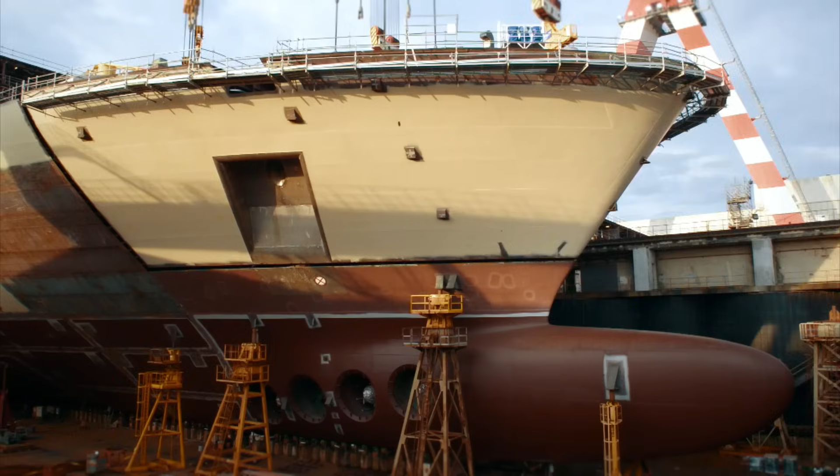Today, this team of elite engineers is embarking on an epic endeavor. It's very, very big. They are attempting to build an extraordinary vessel, one of the biggest and most advanced cruise ships in the world. It's like a puzzle, a bigger puzzle. You cannot make a mistake.

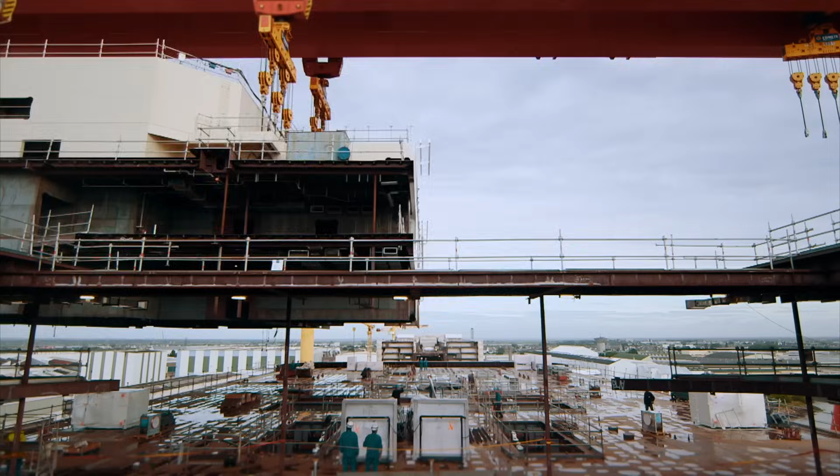This is a ship of giant proportions, constructed from 35,000 tons of steel. It will carry more than 5,700 passengers and have a massive central promenade.

Now the pressure is very high. To build this leviathan, the team must battle mountains of metal. We have to solve problem after problem, and punishing deadlines. We cannot have delay. It's time now that the ship works, and works well.

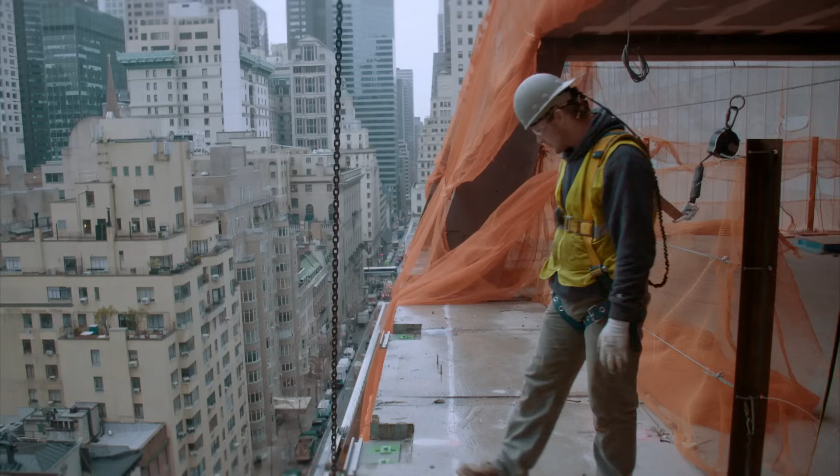This colossal cruise liner ranks in a league of ambitious new engineering wonders that are bigger, faster, taller, and more advanced than anything ever constructed before. This series charts the inside story of the extraordinary challenge of building these giants.

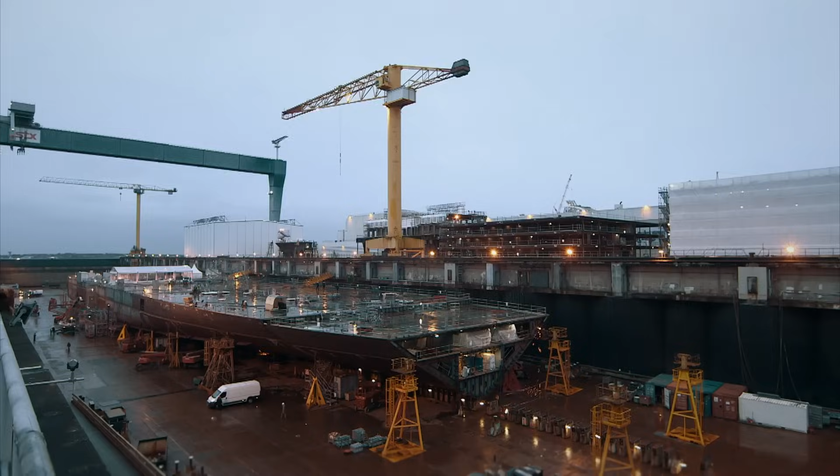In Saint-Nazaire, France, this team of shipbuilders is starting work constructing the prototype of a new class of giant cruise ship. This ship will be impressively huge. The last 15 years, ships have grown tremendously, so yes, it will be big. With its ambitious size and scale, this new prototype will push the boundaries of cruise ship design and engineering.

She is called Meraviglia and is the vision of Pier Francesco Vago. Meraviglia, I think, will really turn heads. We want to make a statement. She's going to be a big ship, and we want to make her fun. We want to have a lot of innovation.

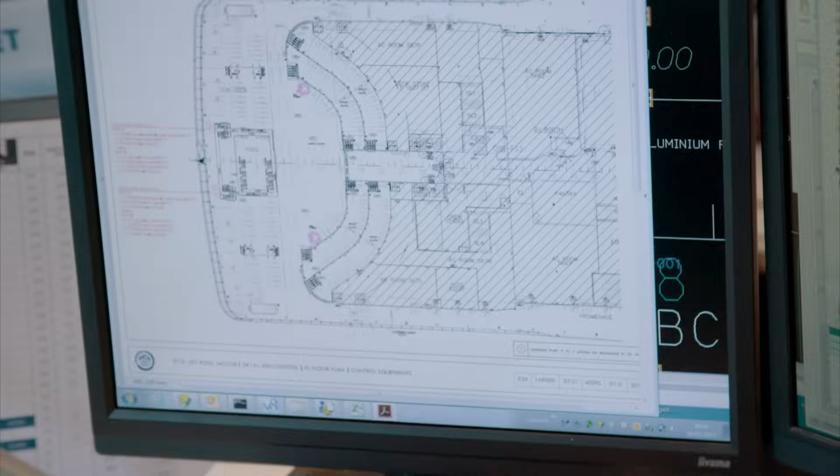Pier Francesco is investing over £725 million in this ocean liner. We're talking about a lot of money, so I'm certainly not going to save on innovation, and I want the latest.

It rests on the shoulders of site manager Gaetano Rolando to make sure that Meraviglia is built to set sail on time. This is a very exciting challenge for me and for all our team, because every day is different, every day is something new.

Gaetano has constructed 6 vessels over the past 15 years, but nothing as ambitious as this one. This is the biggest ship I have built. I'm very excited for this big challenge.

This is the giant Gaetano and a team of 3,000 shipyard workers must build. Measuring 1,036 feet long and 214 feet tall, this ship will weigh more than 3 times as much as the Titanic.

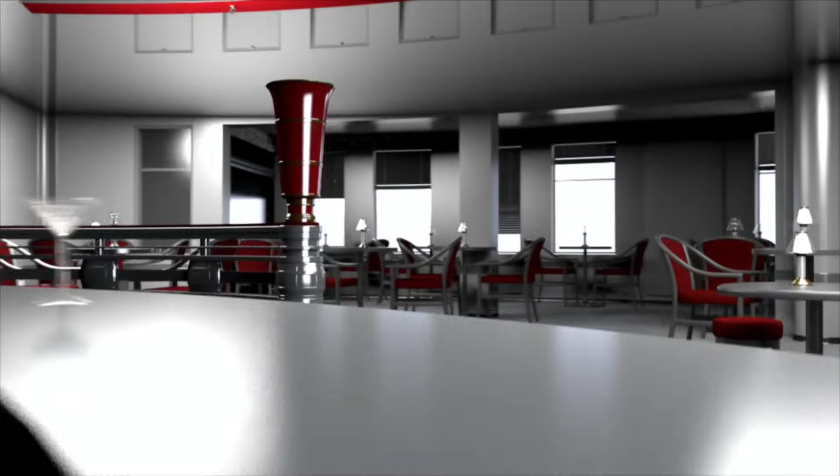On board, they plan to build 20 bars and restaurants, 2 theatres, and 4 swimming pools, to cater for the 5,700 passengers staying in 2,244 cabins.

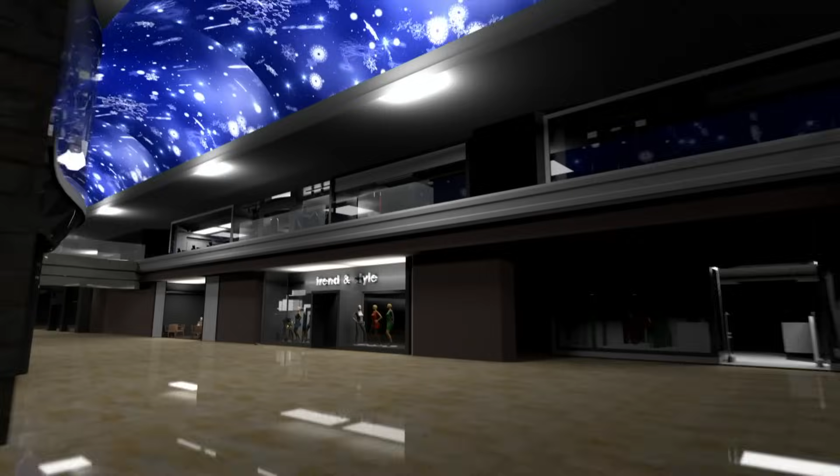4 giant engines will power the ship, propelling 2 rotating 170-ton thrusters. At the heart of the vessel will be a Mediterranean-style shopping promenade, topped with a 262-foot-long LED screen ceiling, the longest screen ever built on a ship.

The company has built 12 cruise ships over the last 29 years, but this will be the largest and most advanced liner they have ever attempted. The pressure is huge, the risk is huge. You keep a ship for 30, 50 years, you can't make a mistake.

To fill the ship with passengers, tickets for the maiden voyage have gone on sale before the vessel is complete, and it's already sold out. Cancelling this high-profile journey would be a disaster, costing the company hundreds of thousands of pounds. So there's no room for delays.

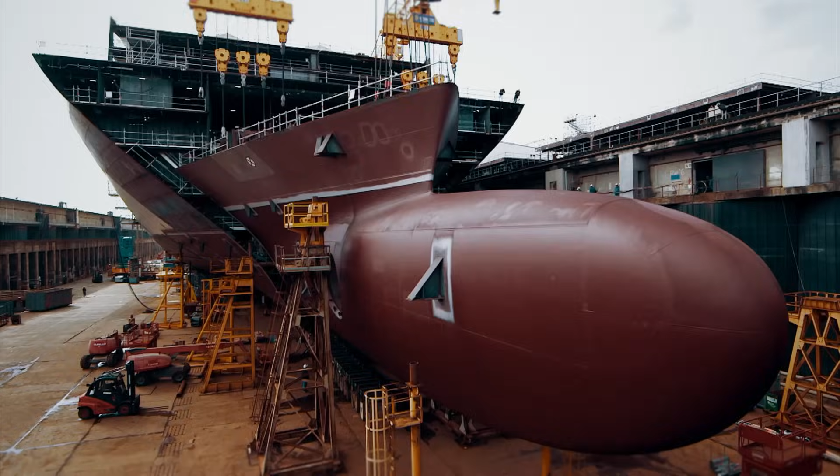The toughest part of my job is to deliver the vessel on time. With the clock ticking, Gaetano and the shipyard have just 26 months to build, test, and deliver the massive ship. Every day, day by day, the pressure on our shoulders is coming.

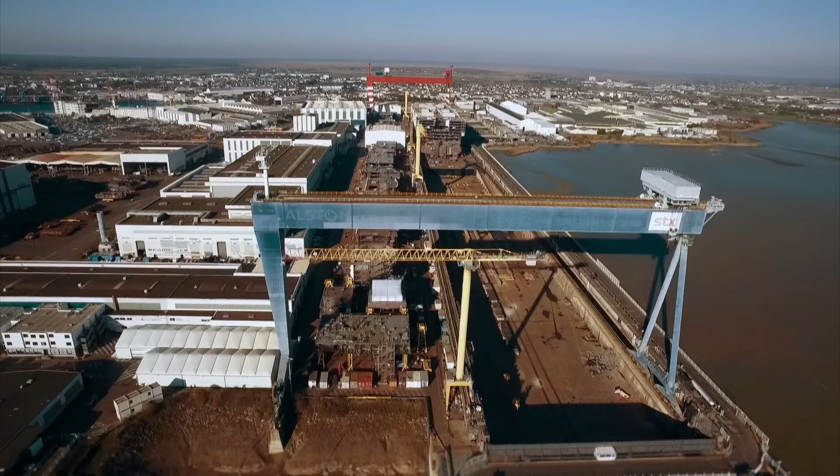Building such a huge new class of vessel requires a huge shipyard. The STX yard in Saint-Nazaire, located near the deep waters of the Atlantic, makes it the ideal place to build this giant.

Marine engineers here have a rich shipbuilding heritage. The prestigious SS Normandie and the Queen Mary II, both the biggest cruise ships of their eras, are just some of the grand historic liners built here. Only a few shipyards in the world can build a ship so big like Meraviglia.

Constructing this prototype vessel involves a series of key challenges. This is the plan. First task: transform 35,000 tons of steel into 50 huge sections, called mega blocks. These blocks will join together to form the ship's hull.

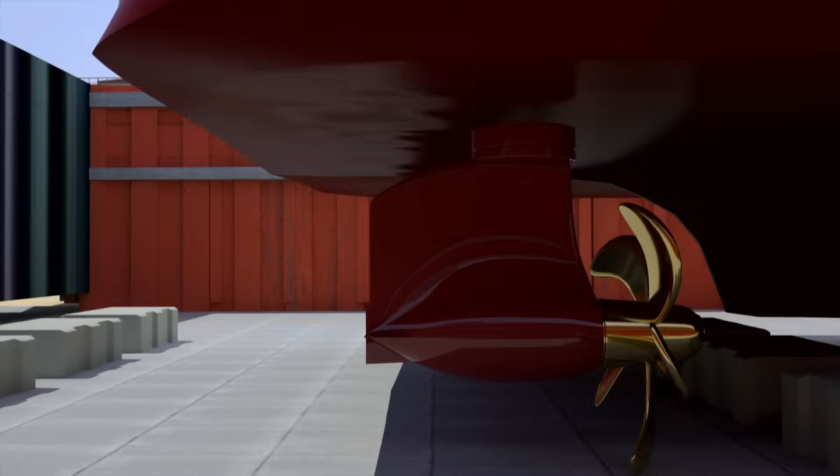Next, workers must build and attach two special thrusters, called azipods. These carry the vessel's 25-ton propellers that will push it through the water.

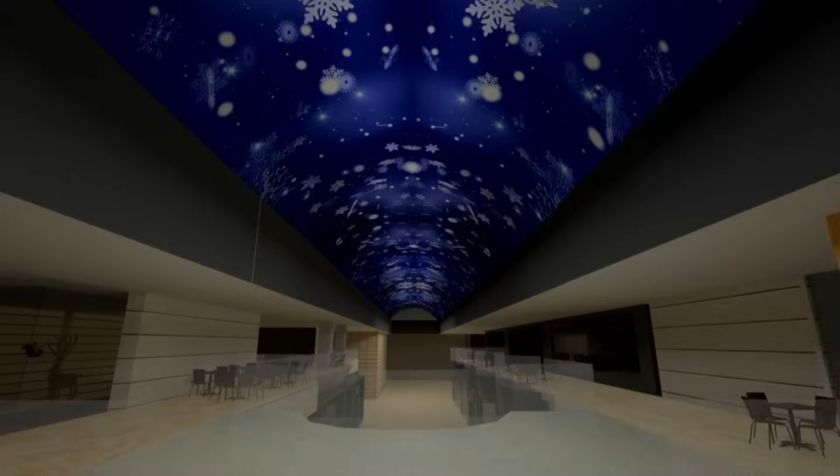Once afloat, the team need to construct and furnish the 2,244 cabins, fit out the decks, and install the 1,450 panels to create the promenade's LED ceiling. Once complete, engineers will need to test every aspect of the ship, putting her through her paces in a series of grueling sea trials.

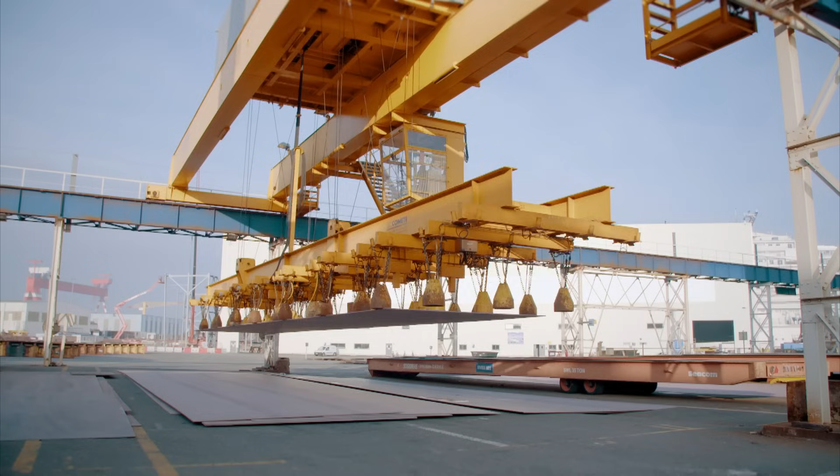Gaetano and the shipyard start with 35,000 tons of bare steel. They must somehow transform it into the 50 giant mega blocks that form the ship's hull. All the steel plates arrive in this position, and then by the crane will be fitted inside the workshop as they need. It's a very heavy and massive challenge for all of our team.

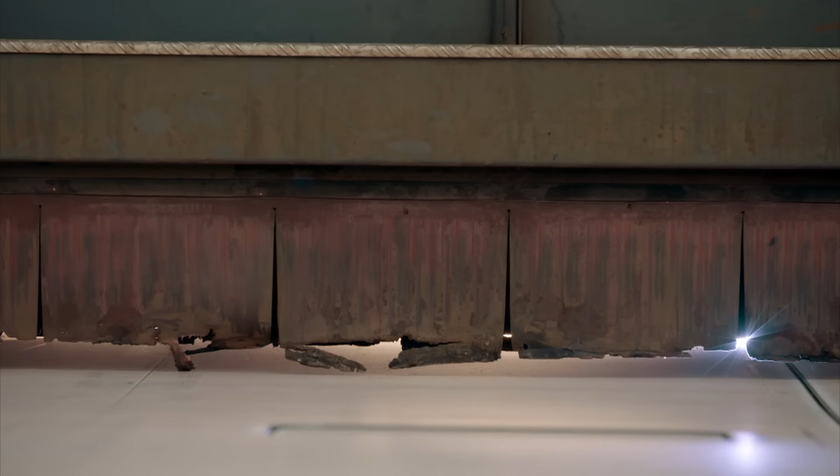Workers feed each sheet of steel into these giant machines. They fire an 18,000 degree Celsius jet of superheated gas called plasma through the steel. This cuts the individual pieces of ship to size with absolute precision. Cutting all these pieces by hand would take years, so they use plasma cutting to be faster.

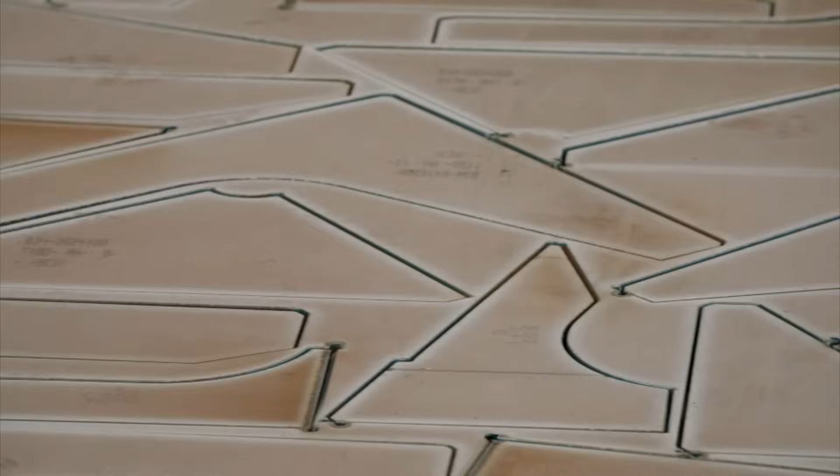They build the blocks from around 300,000 individual steel pieces. It's a giant jigsaw. Workers must sort and deliver each piece to the right workstation so it ends up in the correct place. Any mix-ups could delay work on the whole project. This machine is very accurate and can identify each piece.

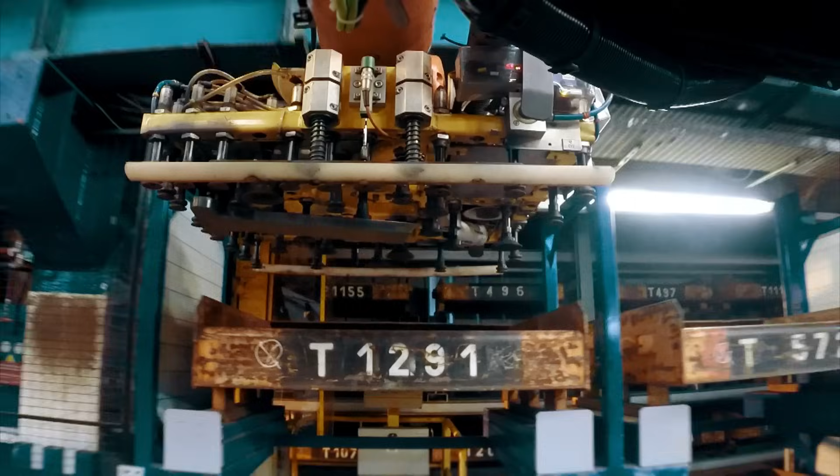Engineers assemble sections of the ship in these workshops. They piece together giant panels that form each megablock upside down. This makes it easier to install the ship's crucial services into the ceiling: the 932 miles of electrical cable, 124 miles of ventilation ducts, and 158 miles of pipework.

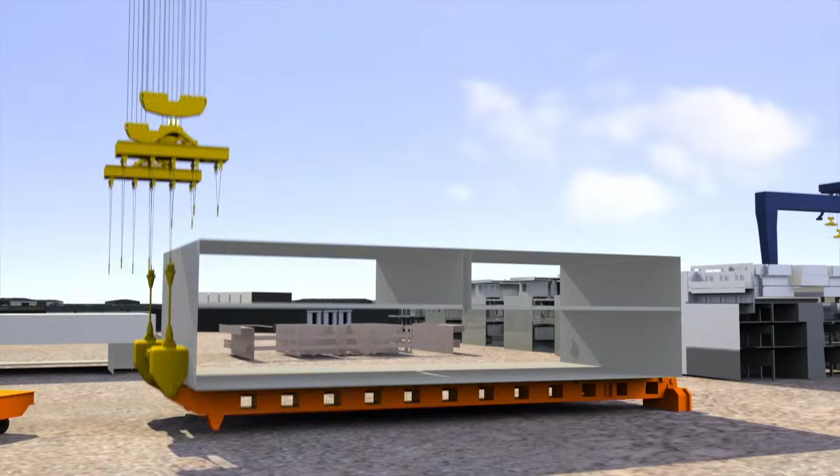Each completed panel measures one deck high. Once fitted out, workers must place it into a special frame to allow the yard's giant crane to lift and flip the panel over, turning it the right way up. Around 20 panels make up each mega block.

The crane lowers each completed block into the dry dock, where workers weld them together. It takes nearly 11 weeks to construct the blocks, but with multiple crews building more than one at a time, this method speeds up the time it takes to build the vessel.

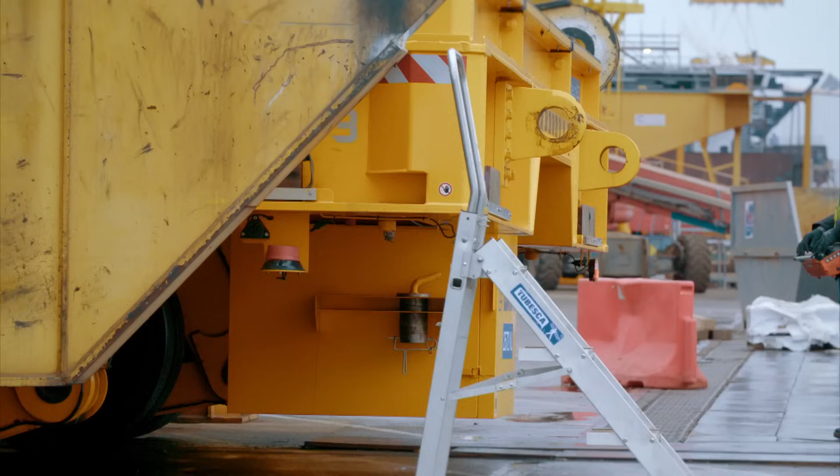This technique is so successful that workers use it to build almost every ship at the yard. For this panel, almost 100 tons is the weight.

They call in this giant gantry crane to turn each massive panel over and assemble the megablocks. Soaring 213 feet tall and with a lifting capacity of 1,400 tons, this is one of the biggest cranes in Europe.

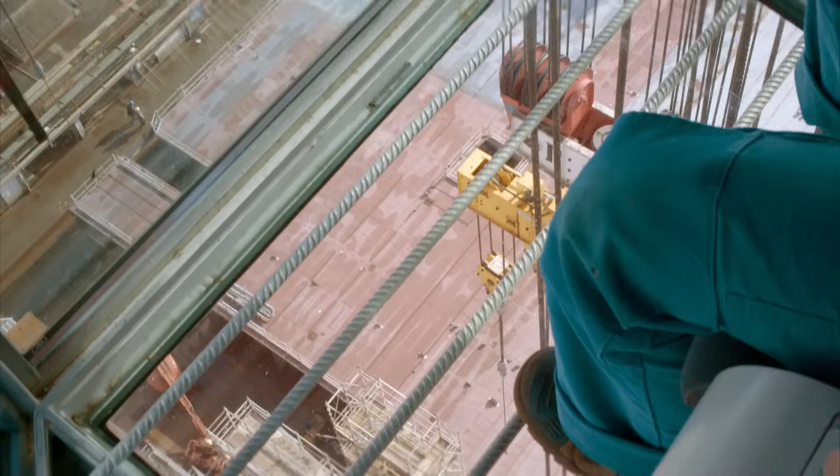In charge of this aerial ballet is crane operator Loïc Gouan.

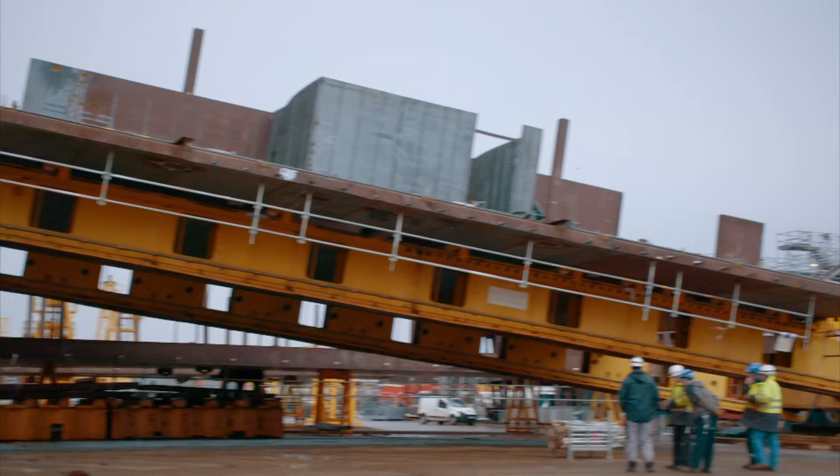The wind is also an important factor of this operation. If the wind is much more, they have to stop the operation. Now is most critical because we'll come out of the hinge.

The panel hangs like a huge airborne sail. A sudden gust now could prove disastrous. It can make a damage to the crane, to other panels, to the people. Up to now, everything is going well.

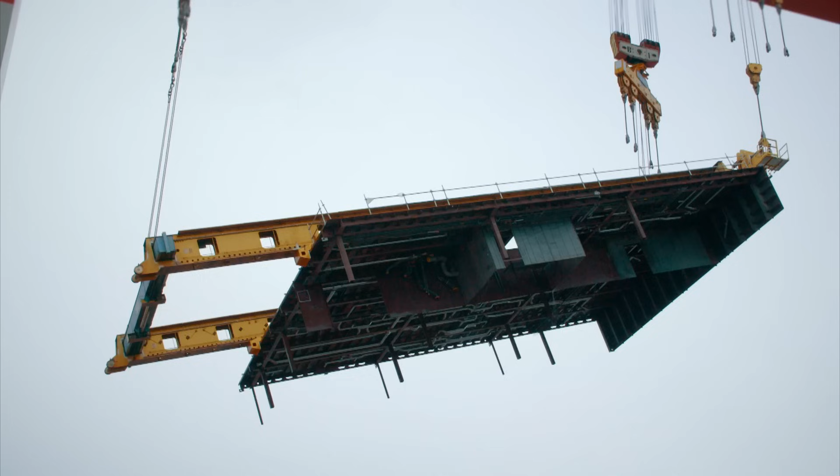They lower this panel down to form the base of a new mega block.

Now is time for lunch. Most important part of the day.

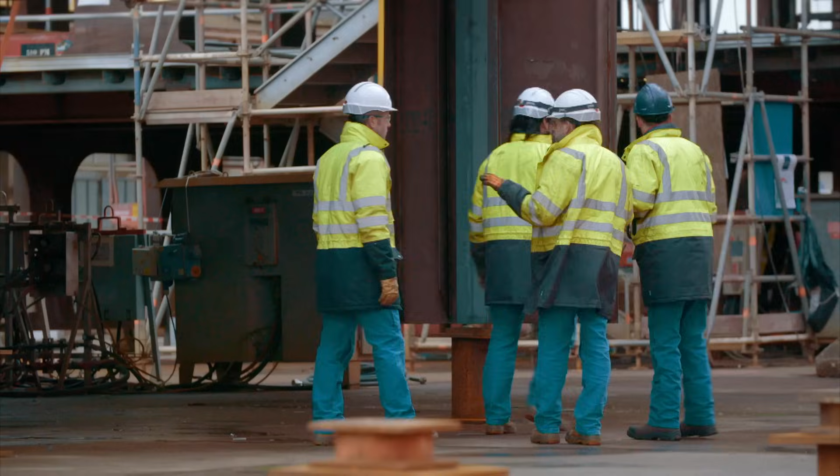Each mega block takes 11 weeks to build. The blocks fit together to form the ship's bow, central hull, stern, and the captain's bridge. It takes around 11 months for the shipyard to fit all 50 giant mega blocks together to form the vessel's skeleton.

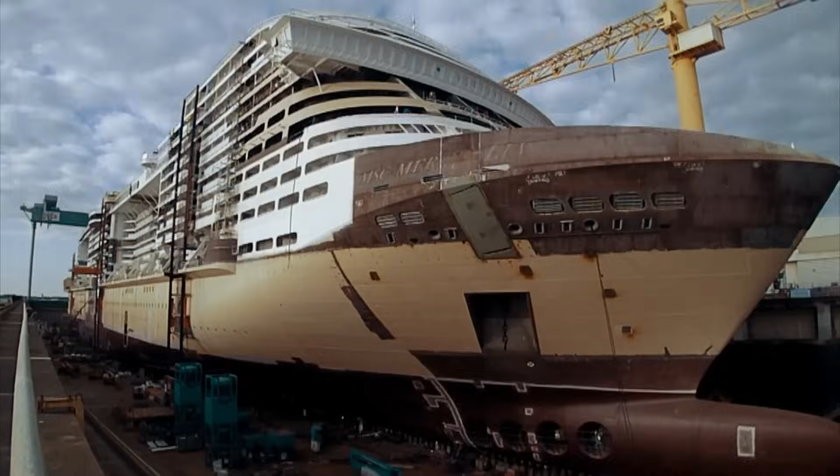With more than 8 miles of joins to weld and 10 football pitches of bare metal to paint, the dock team has their work cut out.

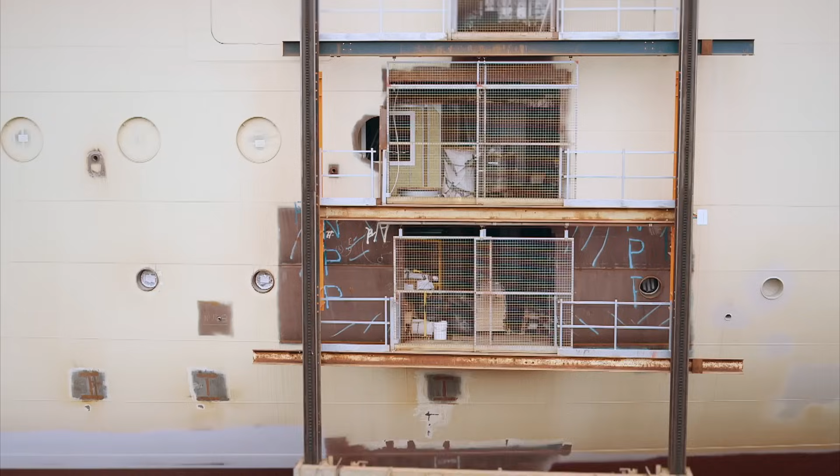As the bare skeleton of the vessel begins to take shape, another team is gearing up to start the monumental task of fitting out the inside of the ship.

Giuseppe Maresca is in charge of overseeing the installation of a staggering 2,244 cabins. It's very important for us to have all the cabins on board in the right time and before the delivery date. Otherwise we will have unhappy guests and unhappy bosses.

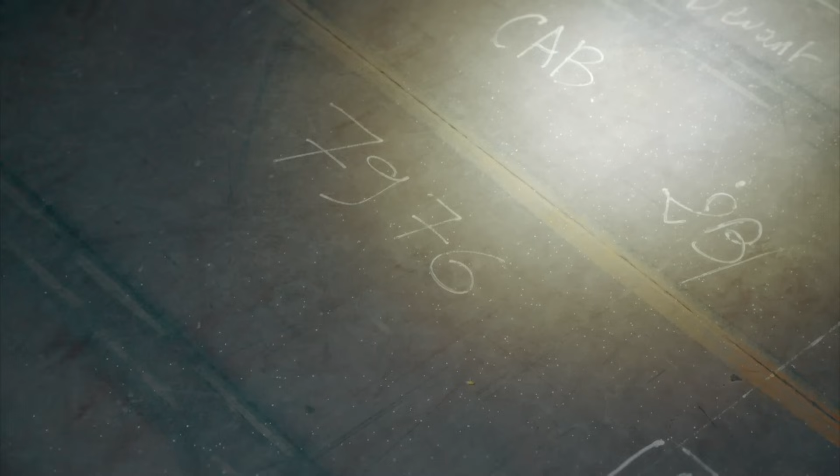The cabins will have access to a balcony. To check the position of the cabin, we can see the tracing on the floor. This is where one cabin will be, and there another one, there another one, there another one.

Giuseppe faces an enormous problem. It would take years to build and fit out each individual cabin on board by hand. The ship would never hit its maiden voyage.

They've been developing an ingenious solution to this problem at this special factory just outside the yard. Welcome to the cabin factory. And this is where we build our cabins.

Every 25 minutes we produce one new cabin. That means in one day we have produced about 16 cabins.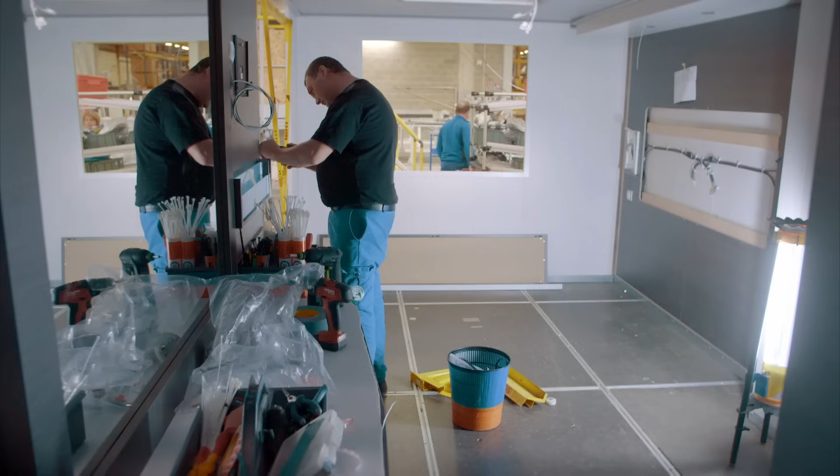Instead of building each cabin from the ground up on board the ship, Patrick's team is pre-assembling each room, just like flat-packed furniture, on this unique assembly line. Each unit starts life with a watertight bathroom shell. They install the electrical wiring, plumbing, bed frame, even a desk.

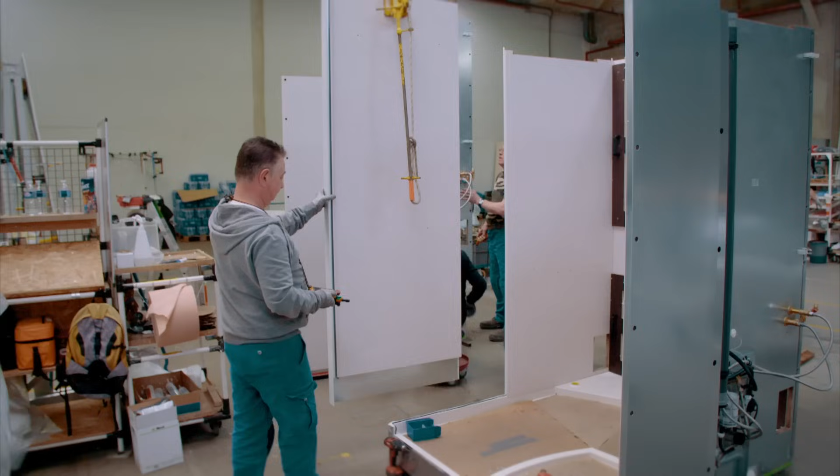Meraviglia has been quite a big challenge for us, to produce such a large quantity of cabins in a small period of time. We start with a base frame and put the walls around, then do the roof on top. We'll put the furniture inside. I've never had a shower in this wet unit, but my production manager has already tested that on the production line, yes.

They fit the air conditioning, Wi-Fi points, and touch-sensitive lighting to complete each cabin unit. Most of the furniture comes already assembled, except the big furniture that we will assemble ourselves. Again, one wardrobe every 25 minutes.

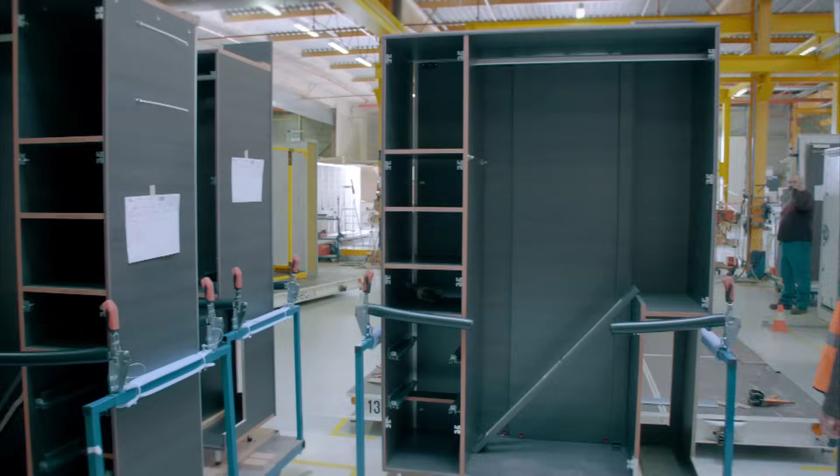Before finishing, they need to install one key piece of equipment to make sure the cabins fit quickly into place on board. This is where we connect the cabins to the ship with that plug. This is plug and play. The cabin is just finished - we just need to connect it to the ship and it will work. As simple as that.

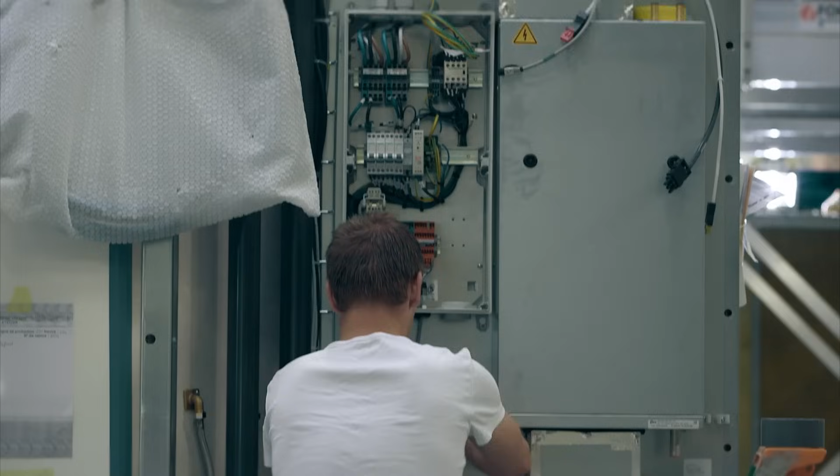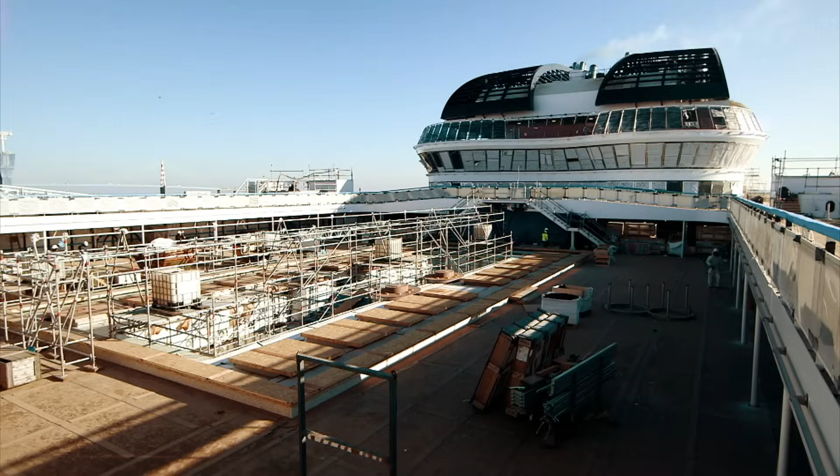The team must now gear up to float the ship to a different quay before workers can continue installing the vessel's cabins, restaurants and entertainment zones. Before they move the ship, they must first fit its two massive propellers onto the stern.

Loïc Morin faces the daunting task of designing the complex propulsion units. They must be capable of propelling this enormous ship without compromising the comfort of the journey. The propeller design is unique for each cruise ship. The challenge to design a propeller for Meraviglia is to reach a compromise between the propeller's efficiency and the negative effect, which can generate noise and vibrations on board.

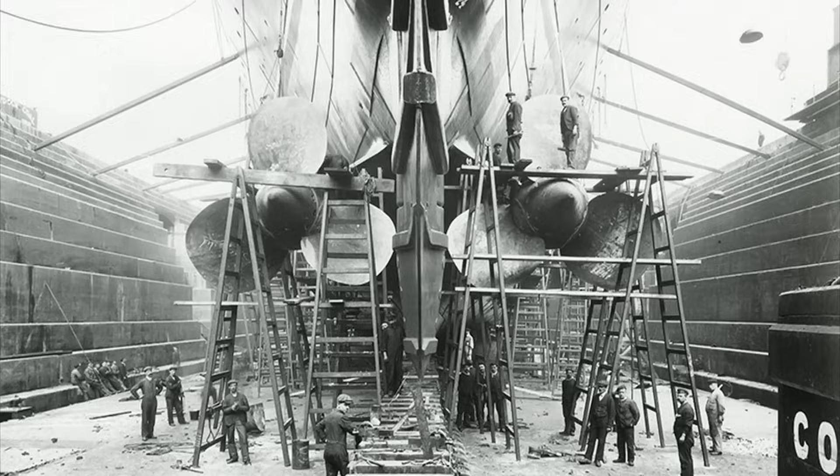In 1907, during the sea trials of the British ocean liner the Lusitania, engineers reported intense vibrations running throughout the ship. The cause was traced to the ship's propellers.

This is the problem: when a ship's propeller rotates, it creates a vortex of low pressure behind the blades, made from millions of tiny air bubbles. This process is called cavitation. When these bubbles implode, they send out shock waves through the water, hitting the propeller and the ship's hull.

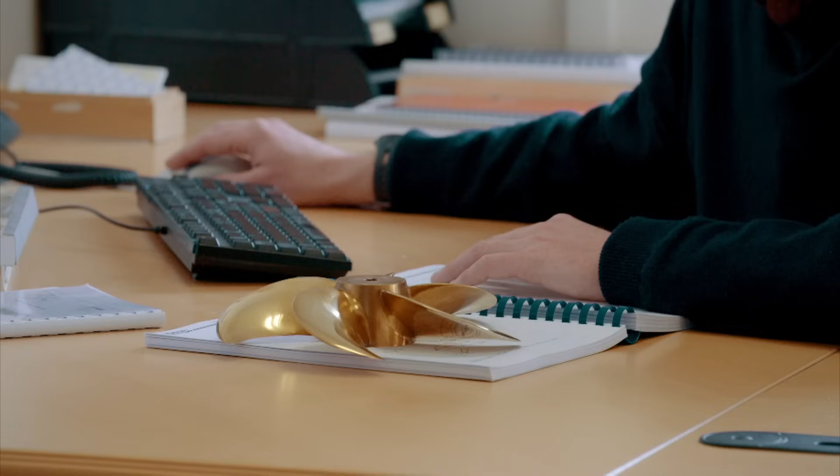If enough bubbles implode at once, it can cause vibrations that run through the ship. These can create an uncomfortable ride for passengers and crew. The standard of a cruise ship is very high, so we have to be sure the ship will be quiet, with no vibrations and no noise levels due to this propeller.

With the stakes high for this giant new class of vessel, no off-the-shelf propeller design will work. So Loïc has had to come up with a bespoke solution to ensure this vessel is their smoothest ship yet. To try and minimize cavitation, he has designed a propeller with 5 blades, perfecting their shape, angle, and distance from the hull, and the speed at which they rotate, to make sure the ship glides smoothly through the water.

So we are using the most advanced propeller design tools in order to be sure that we are supplying to the ship owner the best propeller design in the world.

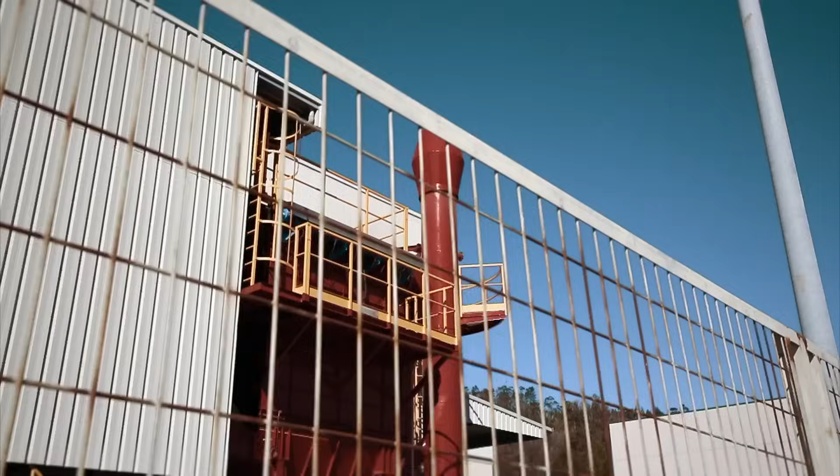Building such intricate propellers is no simple task. I love my job, for sure. I love to make the best propellers in the world.

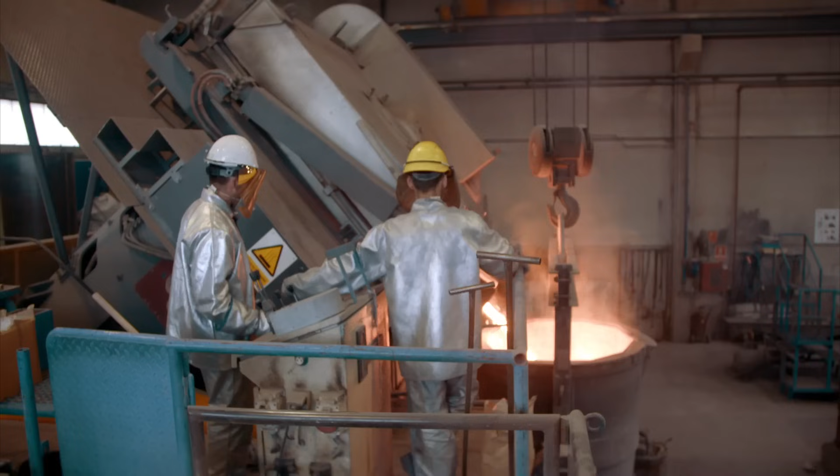Workers cast the propellers from a special molten bronze alloy, a mixture of copper, aluminium, iron and nickel. The cruise propeller blades are very big blades. They cast the 25-ton propeller in separate parts, the blades and the central hub.

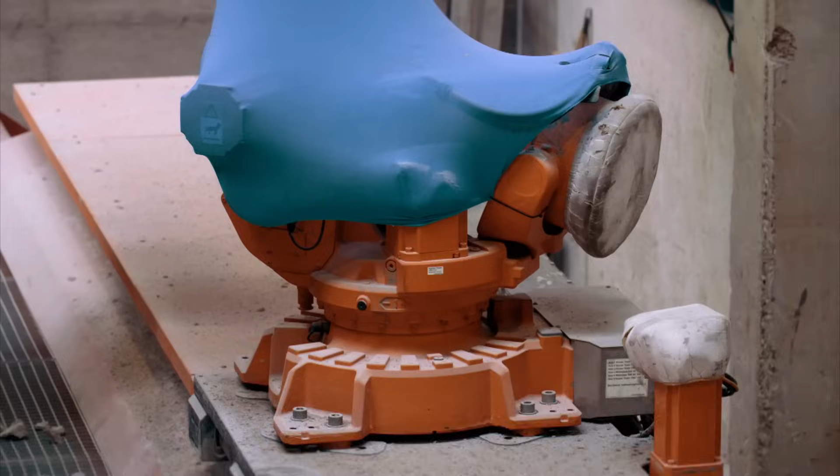Workers fill a series of boxes with resin-bonded sand to create the molds for the blades. What we do here is put the sandbox in front of the robot, and the robot will be able to remove the sand and create the final shape of the mold.

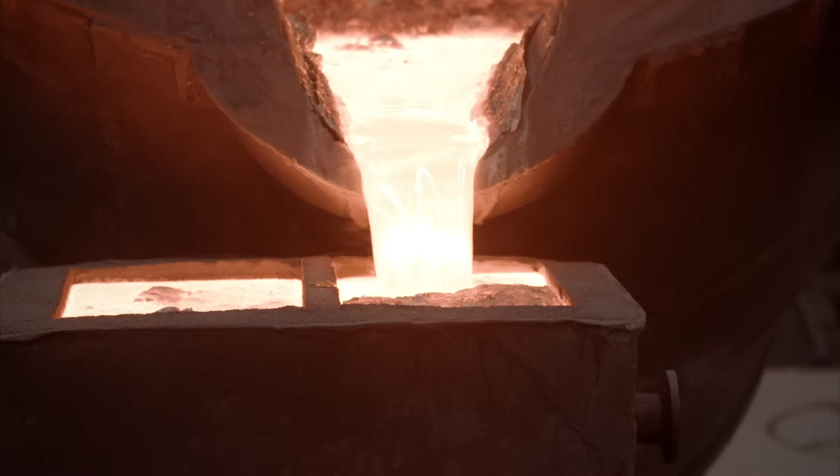They must pour the molten alloy into the mold without stopping, to avoid any imperfections that could compromise its strength. When we are pouring, it's very important that the material goes inside the part with the right velocity. Otherwise, we can have oxides or other kinds of defects that will appear.

It takes just minutes to fill the mold, but 2 days for the blade to cool and harden from over 1200 degrees Celsius.

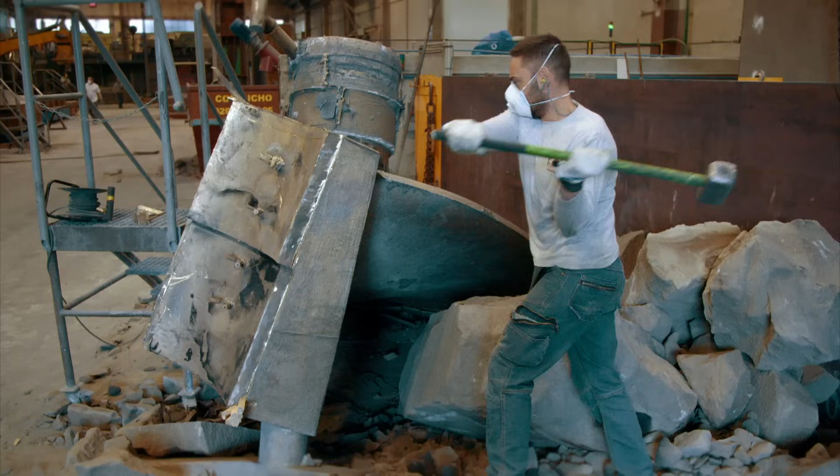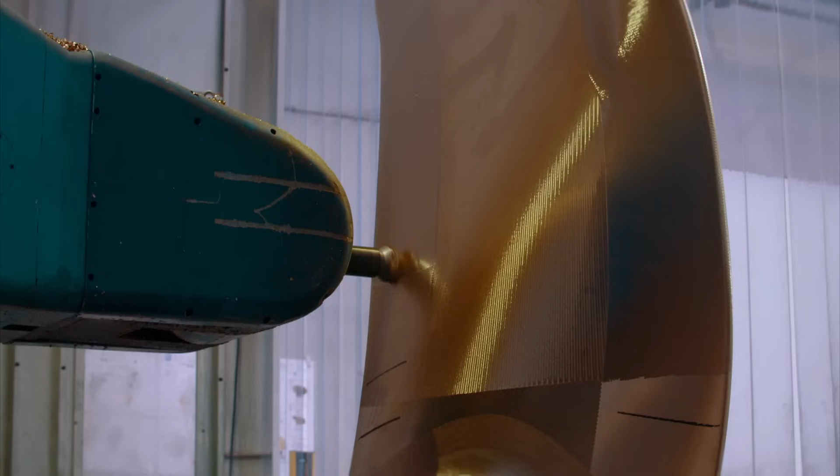They remove the blade from its mold, then grind its surface smooth to make sure it glides through the water. A computer-guided rotating cutting head removes layer after layer of unwanted material. It's very important that we mill these propellers precisely, otherwise we can have big imperfections on the surface. And this will affect the performance of the propeller, and the passenger will be affected by that.

It takes 25 hours for the robot to glide over the blade thousands of times, polishing away every last defect to avoid a bumpy ride. When we achieve the delivery, we feel very well, all the team.

Using propellers this large creates another big problem for engineers: keeping the ship maneuverable. The propellers on most ships are connected to the hull in a fixed position. To steer the ship, the captain uses a rudder. But this limits the vessel's maneuverability. For a cruise ship as large as Meraviglia, navigating through the tight ports at popular destinations would be near impossible.

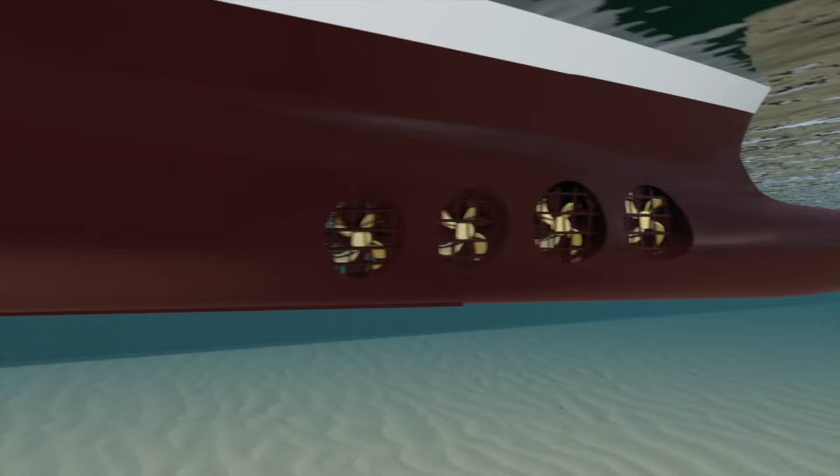To solve this, the engineers must attach the propellers to 2 giant rotating thrusters, called Azipods. These huge pods can spin round through 360 degrees. The rotating pods, together with small thrusters in the bow, should make controlling the ship much easier and allow this giant to breeze into the tightest of ports.

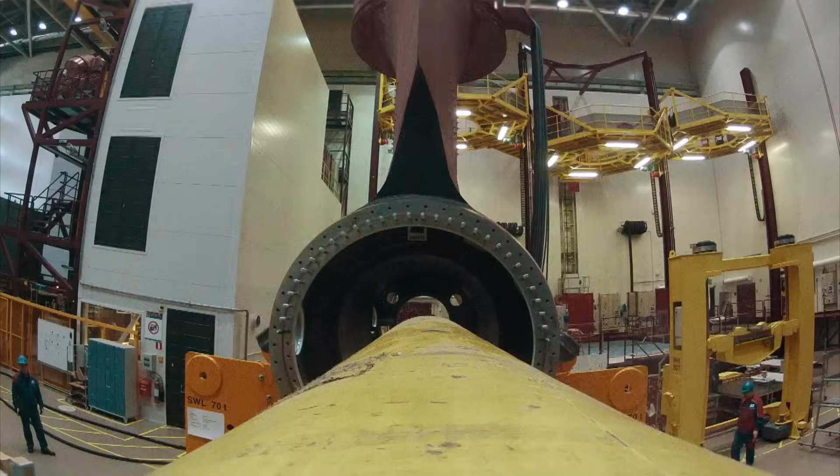Tipping the scales at around 170 tons, it takes 10 weeks to assemble a single azipod unit. The combined propeller and pod weigh nearly 200 tons apiece. Fitting them onto the vessel's stern will be a huge challenge. Any damage during the installation could set the entire project back by months.

The azipod for Meraviglia is like the legs. So if the legs are not working properly, the ship cannot sail properly in the sea. So it's very, very important, the alignment, that everything is working perfectly.

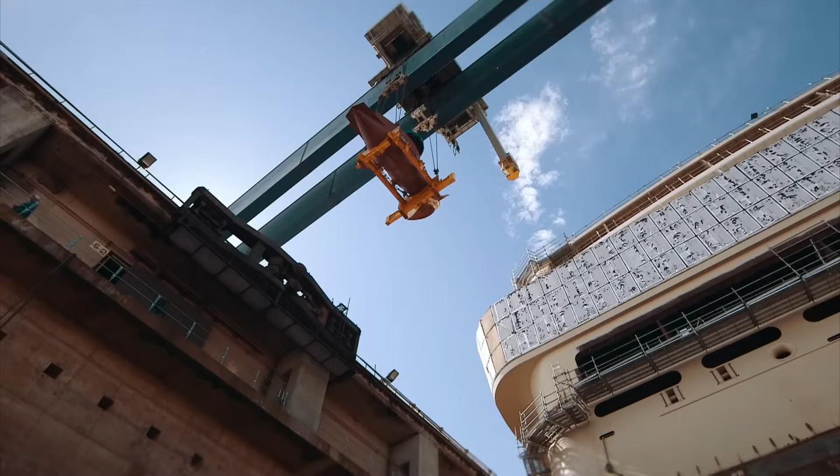The huge crane lowers the units down into the dock. Workers then carefully slide them underneath the ship before locking them into position. So up to now the progress is good enough. Everything is according to the schedule. With the pods attached, the hull of Meraviglia is finally complete.

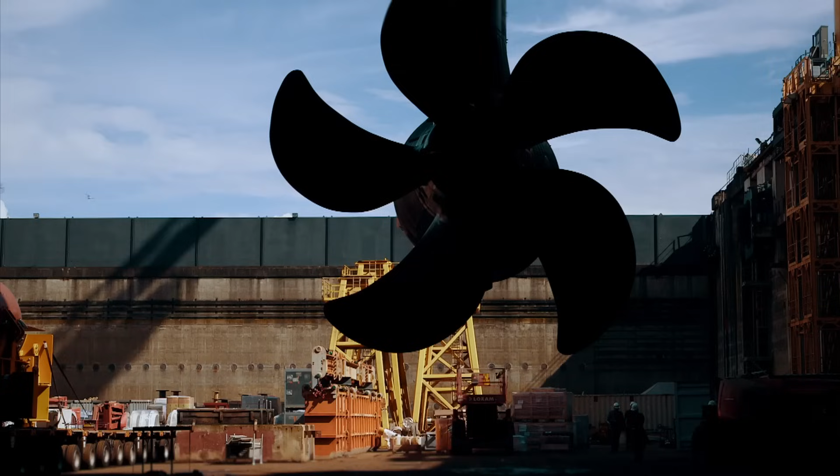Inside, the vast 315-foot-long, two-story-high promenade that runs down the center of the ship is taking shape. But before the team can fit out the vessel's interior and install the cabins, workers must move the ship to a new quay. To do this, they must float the prototype vessel for the first time. This is a major milestone for the company bosses, who've arrived to witness the event.

It takes 8 hours to fill the immense dock. Later that night, she's floating and ready to move. Meraviglia is so big, it takes 5 tugs to carefully tow her round to her new berth.

In the shipyard's kitchen, Giuseppe Maresca is cooking lunch to fuel up his team, as work on the ship's interiors can finally begin. Lunchtime for me is very important, because at the moment I stop my normal work and I start with something which is just relaxing and kind of creative. Our work is quite stressing and quite hard. We work a lot of time and long hours, and we have many responsibilities. Eating together and eating good can help us to keep the morale high.

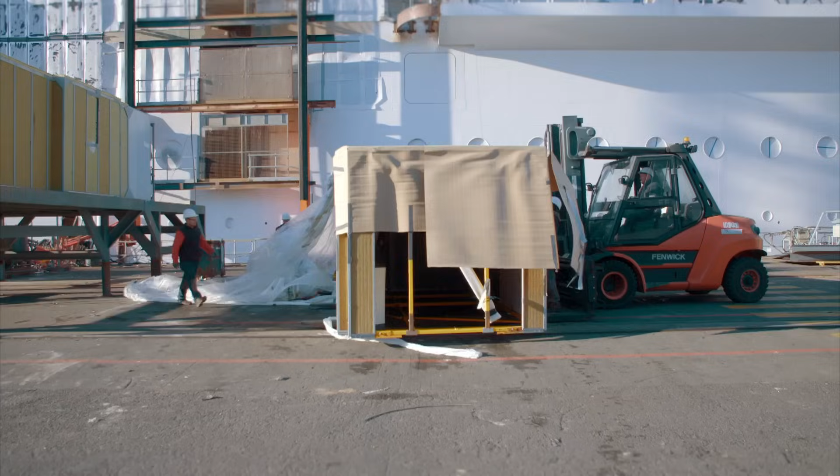Giuseppe's team may be fueled up, but they'll have their work cut out installing the 16 cabin units that arrive from the factory every day. It's a massive challenge to get all the cabins installed on time. From 6 in the morning we will have a truck coming here and cabins loading and loading and loading. To keep pace with the relentless supply of cabins, Giuseppe and the team are using an ingenious technique to install.

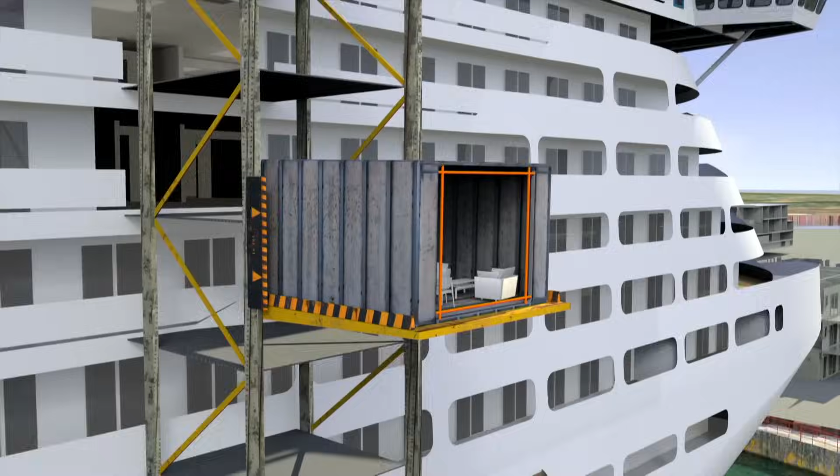Special holes in the side of the ship provide access to slide the cabins on board quickly. They'll secure a giant lift onto the outside of the ship to reach them. They load and lift each cabin onto the ship. Special rollers allow the team to push the cabins on board, squeezing them through bulkheads and around tight corners, so they can slide them into the correct spot. It's a bit like I'm unwrapping a new Christmas present every day.

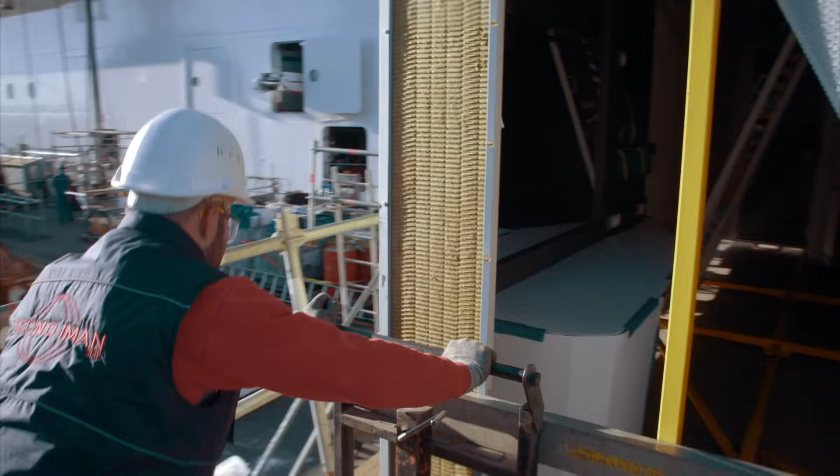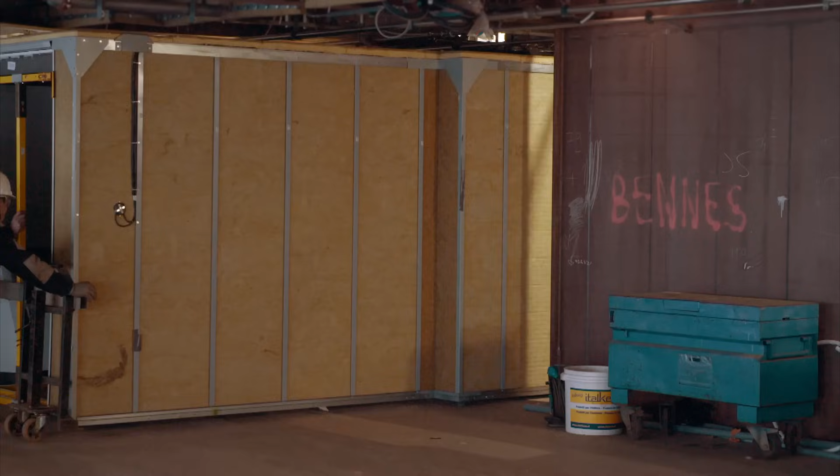This is where we get off. Stop! Push. It's a tight squeeze to guide each of the 1.5-ton cabins through the maze of equipment and workers that cram the inside of the vessel. One of the biggest problems is the space to put the cabin in position. It's every time like this. It's a lot of hard work.

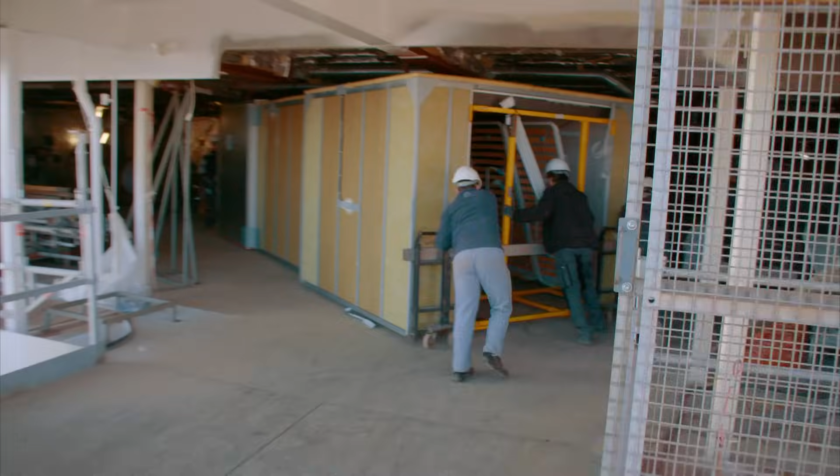If a single cabin gets damaged, it could hold up the installation of an entire deck of rooms. All the works on board are connected, so we cannot have delay. This is inside of the cabin. Here we have the toilet, this is the wardrobe, and here we have the beds. There is no visible damage from the transportation. Yes, cabin is fine. Another one done, and we still have 1,000 more to put on board.

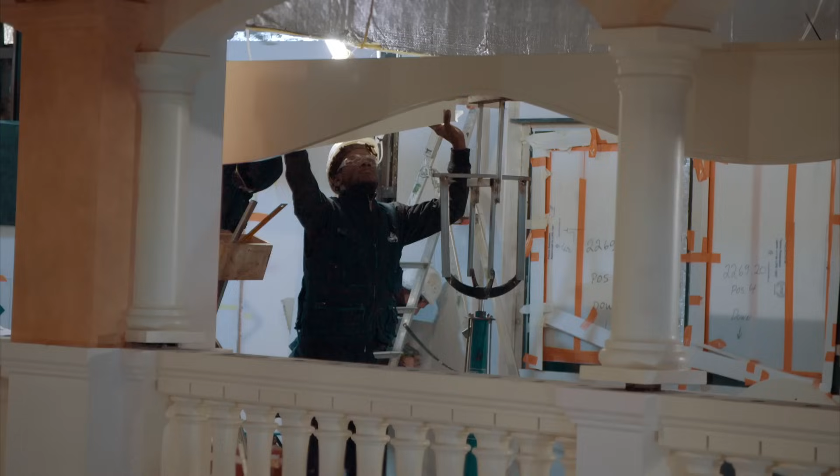While Giuseppe's team pick up the pace, on the lower decks, workers are racing to fit out the ship's cavernous promenade. This space is being designed to look like a Mediterranean-style seafront. The two-story high promenade will be filled with shops, restaurants and cafes.

Giuseppe, this is an Italian coffee bar. Yeah. Do you like to take a real Napoletan coffee? Of course, I do espresso, 10 times a day. The first coffee will be for us, for sure, in this Italian coffee bar.

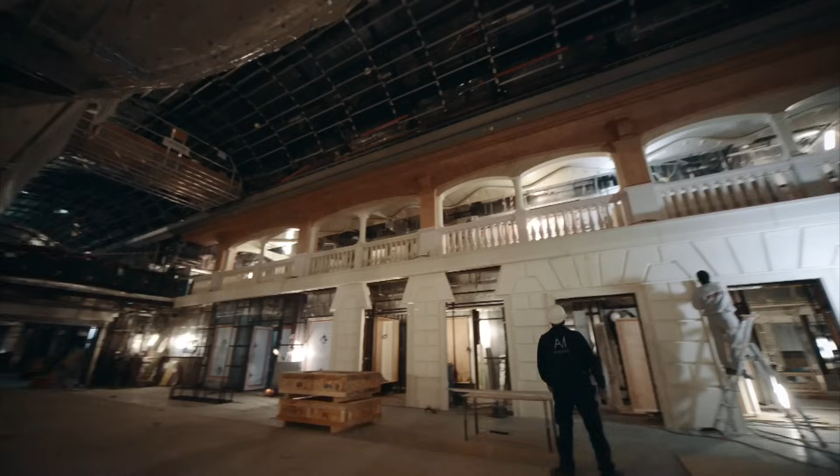There's a huge amount of work for the team still to do. Their biggest job, installing the ship's giant LED ceiling. The ceiling is the biggest LED screen in the world ever built in a vessel. The challenge will be to complete all the LED in time.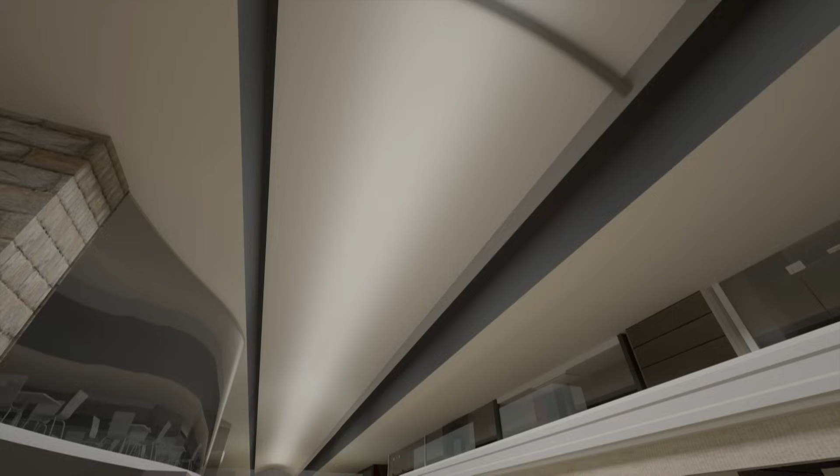Instead of a standard glass skylight to cover the promenade ceiling, the team plan to break with tradition. They're preparing to install a never-before-attempted curved LED screen. It stretches 262 feet long and runs the length of the promenade. Installing it won't be easy. Workers must carefully piece together 1,450 individual LED panels to create the curved dome-like structure.

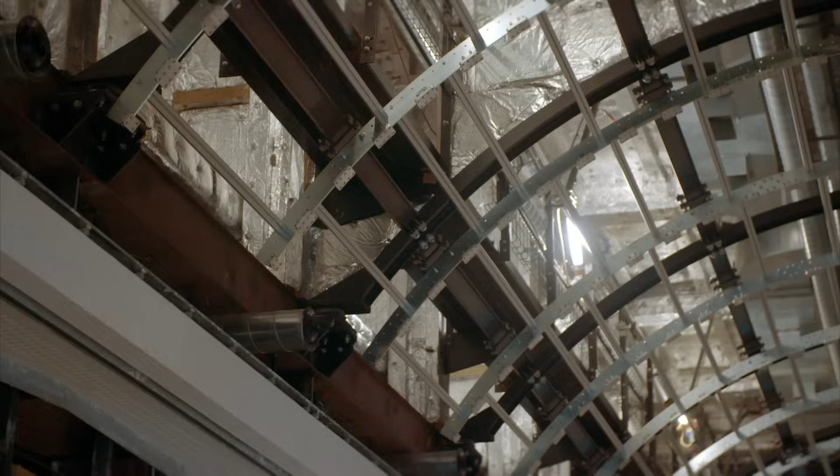Once complete, this LED screen will be able to display anything the ship's crew desire, changing the ambience of the entire promenade at the touch of a button. The schedule for this area is very important because this is the heart of the ship. So without this room ready and perfect for the delivery, it will be a big problem.

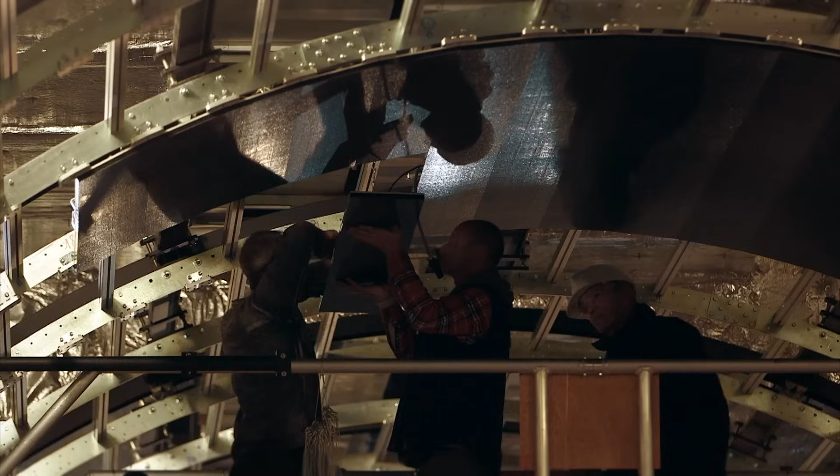It takes 3 months to install all 1,450 LED panels onto the giant curved frame. Thousands of cables connect the panels together. If just a single cable is incorrectly connected, the screen won't function properly.

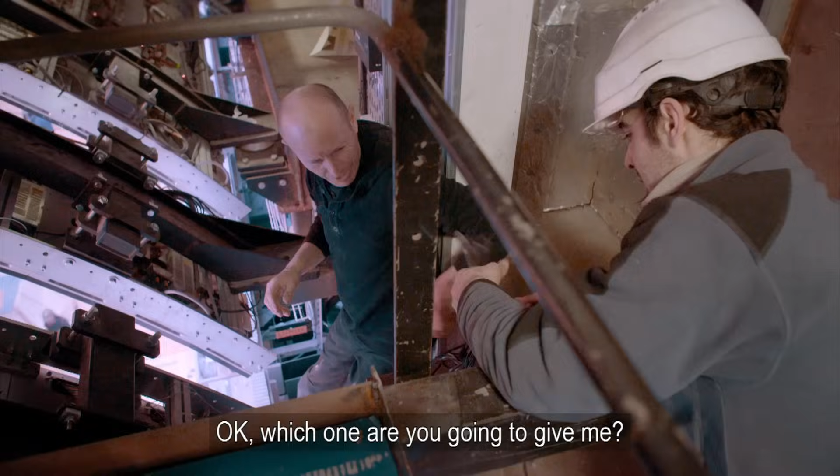With all the panels in place, it's time for the big test. Will all the sections of the 262-foot-long screen light up? What we are looking at today is to have a complete and full image on all the vaults without any problem, without any pixel missing. Of course, the expectation of the owner is to have a perfect feature from the beginning to the end of the vault. So a very beautiful challenge for us. And let's see now what happens.

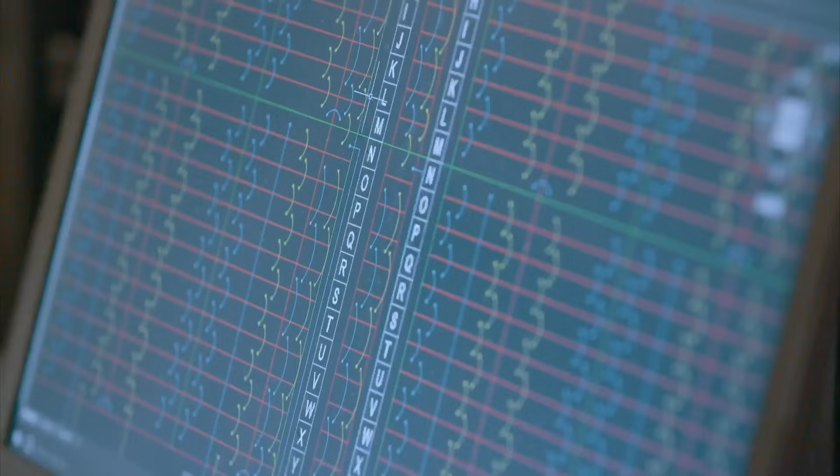The video must be the same as the one of the flower. But it's not long before they hit a major glitch. Stop the screen and have a look to the small phone if it's working for the video. This is a mistake on the drawing. So strange. There is something that is not clear. We have one big black hole because there is a cable that is broken.

You set the configuration? Yes. Nothing changed? No. We are solving problem after problem. When you find a problem, you have to solve it and then go to the next step. We have a problem here because we never tested. Yeah, and you didn't. And here also.

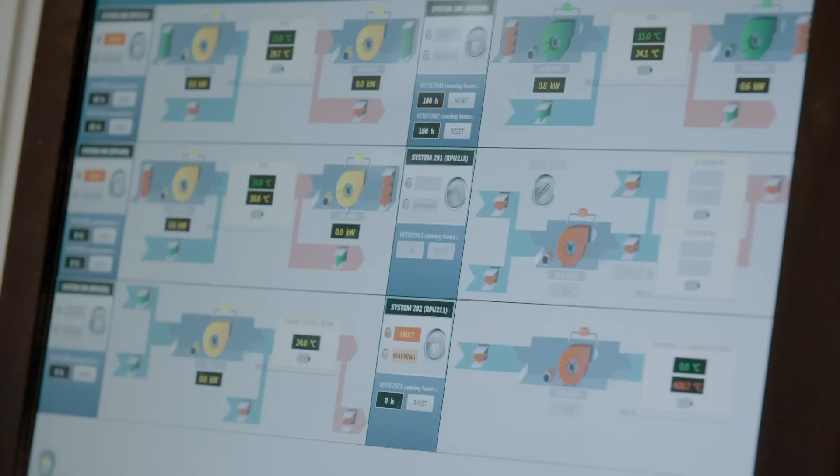Meraviglia is a prototype ship, so the sea trial is the only moment where we can assess the performance of the ship. Of course, if we don't pass the sea trial, we cannot embark any passengers, we cannot deliver the ship, so we have to pass the sea trial. The man Meraviglia must impress is lead inspector Jean-Luc Conneur. It's the biggest ship I've ever done on sea trial, sure.

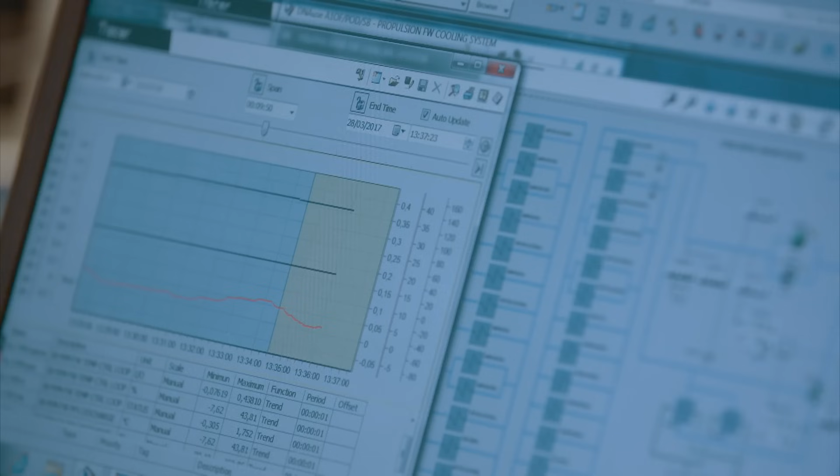The ship has to pass 100% of the tests before they are able to take passengers on board. The team push the vessel to its very limit over the next 72 hours. They test its fire safety equipment. They assess how easily emergency crews can reach a helicopter and how quickly the anchor deploys.

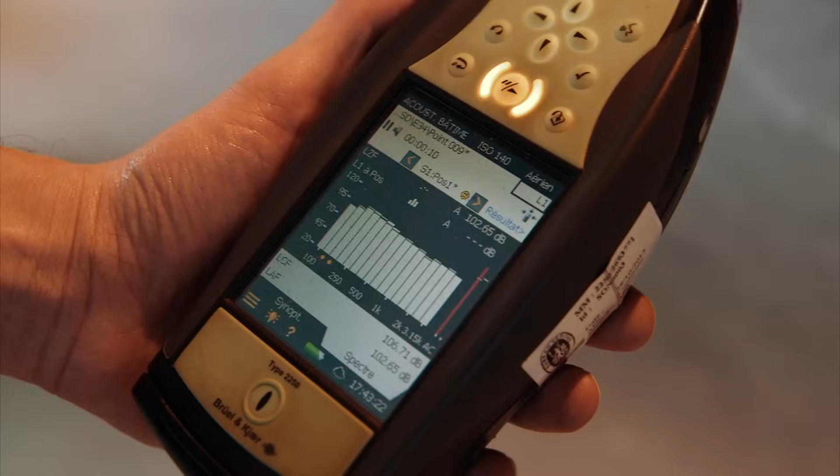One of the most critical tests involves the ship's propeller. It must create no noise or vibration that could ruin the passengers' cruise. We perform the test all over the ship, in all compartments and all decks, during the endurance test of the ship, because this is the most severe condition of the ship for vibration and noise. While the ship sails at full speed, the team work their way from deck to deck, listening for excessive levels.

Finally, they test the giant azipods that both propel and steer the vessel. This is one of the most important equipment on board. We need 100% perfect to perform 110% of the power. The crew will push the giant pods beyond their limits before undertaking a critical crash stop test. So gentlemen, we are going to do crash stop test.

A crash stop involves using the azipods to bring the ship to a complete halt from a speed of 21 knots as quickly as possible. The test will be done by rotating the azipod propeller outward first 45 degrees. Okay, so we started by taking it to maneuver right now. Okay, crash stop! This maneuver could be crucial in an emergency such as avoiding a collision.

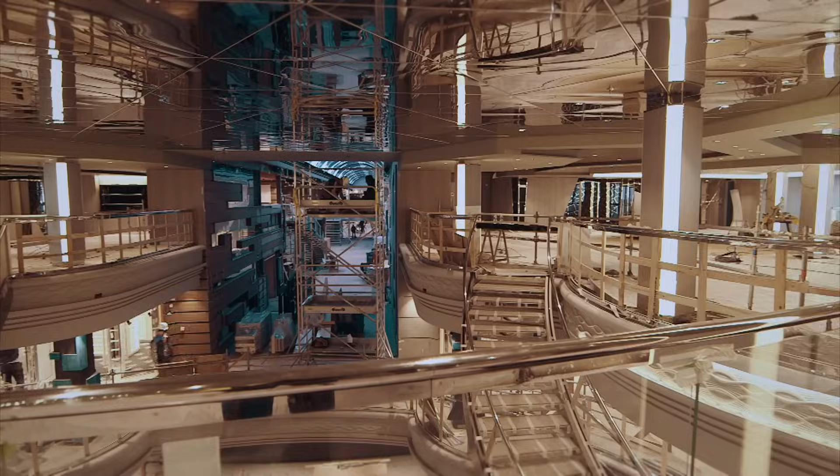Over the next 9 weeks, it's a frantic race to finish the promenade. Alongside workers, the entertainers practice their routines. And chefs fire up the kitchens as the clock counts down to the maiden voyage. Two years after work began on its construction, Meraviglia leaves the shipyard. Destination? The port of Le Havre in northern France, where the vessel will be christened ahead of her maiden voyage.

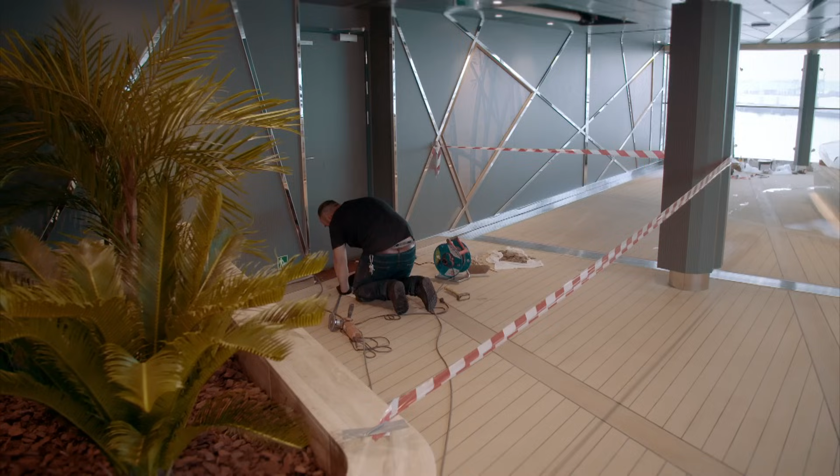But on board, the ship's still not finished. In the indoor pool, there are some touch-ups to be done on the handrails of the stairs, also all around the jacuzzi. The technical people are going around all the ship to check that everything is done. It's time now to be sure that the ship works and works well. It's a scramble to complete the finishing touches as the ship closes in on Le Havre. Now the pressure is very high because we have to finalize and close all pending items. At Le Havre port, an events team prepare for the vessel's grand arrival.

Today is the day. The ship has reached Le Havre. Everything is finalized. All the touch-ups have been completed. We are very, very excited for this event. But the ship is ready, we are ready, and let's go. As the sun begins to set, the stars come out. Celebrities, VIPs, and Executive Chairman Pier Francesco Vago gather to welcome the ship.

Ladies and gentlemen, I would like to thank the yard. They've done an amazing job creating the most innovative cruise ship today. Please join me in giving a big round of applause for all of the workers. Thank you. In a time-honored tradition, the ship will be christened by a godmother. Tonight, actress Sophia Loren will cut the ribbon.

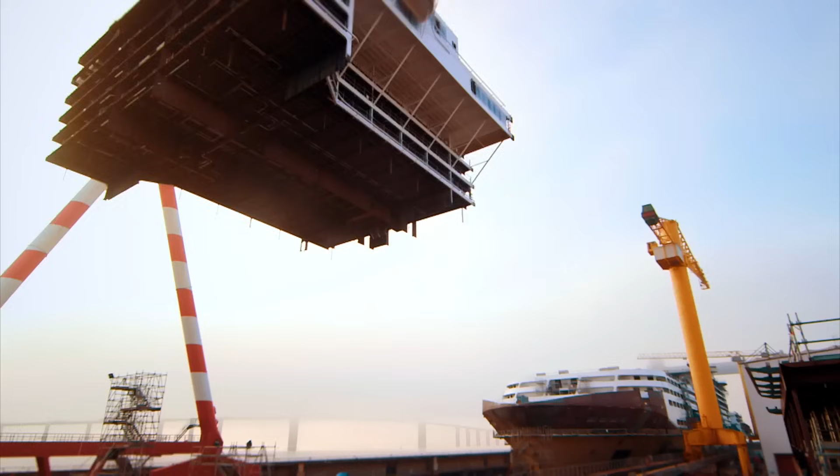Are you ready? 5, 4, 3, 2, 1, go! It's taken 3,000 people, more than 9 million hours of hard work to complete the first vessel in a brand new class of giant cruise ships.

Finally, the ship is ready, it's looking great, and I'm very happy that our work produced this. I'm very, very happy. All our team have been working very, very hard these 2 years, so we are very proud. And this, my first cruise ship, has been a very big challenge, but it's important that the result is good. The following morning, the first passengers board and the ship sets sail on her maiden voyage around the Mediterranean. But only time will tell if the cruise line's huge investment building this giant will pay off.